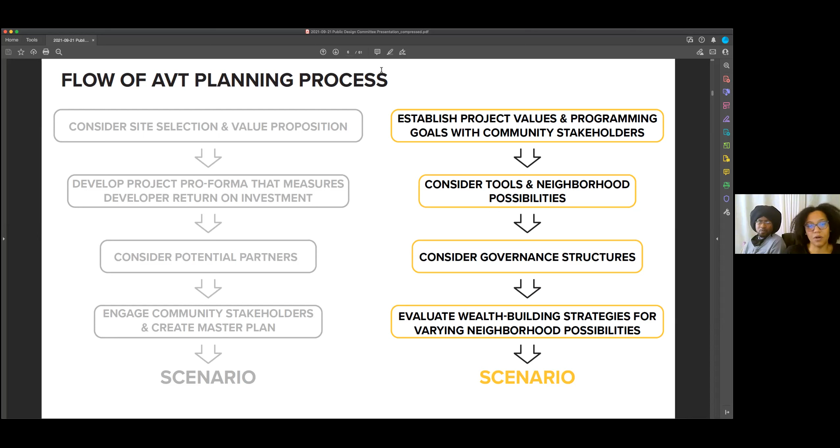What we've been doing is establishing project values and programming goals with community stakeholders first. From there, we move into considering tools and neighborhood possibilities, then governance structures, and evaluating wealth building strategies for varying neighborhood possibilities. All of this was developed out of very important conversations with our community stakeholders.

This is an overview of the roadmap we've been working through this last 18 months or so. We have a series of joy initiatives, which were moments where we were able to really celebrate with the community the history, the heritage, and possibilities for the future.

Those were also connected to community dialogues, which were a mixture of surveys and general conversations, being out in the actual community as much as you can on Zoom, having conversations sometimes one-on-one, sometimes even in other event spaces that lent themselves to those conversations.

And in the orange, you see our workshops, which we split into 3 different sessions, 6 workshops, 3 sessions each. You'll see details in a moment on what we covered in each one of those workshops.

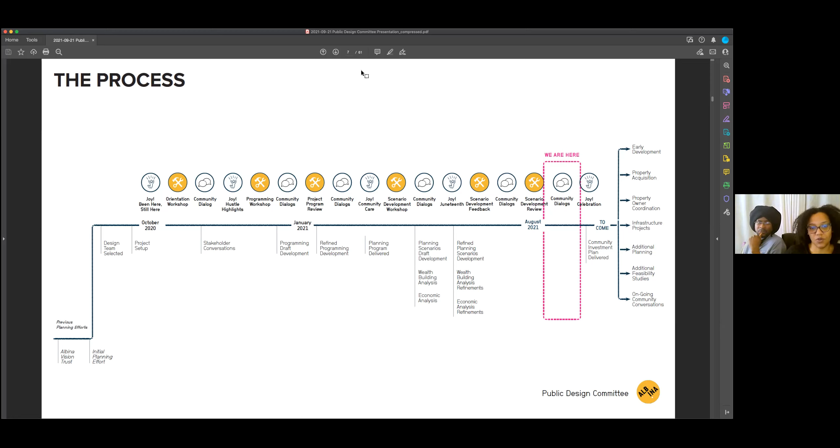Community connections: the Joy initiatives, we've had 4 so far. The first was essentially a virtual concert and interview where we talked with some longtime members of the Albina community and some newer members, getting to know their history within Albina and their vision for the future.

Hustle Highlights was a series of posts followed by a networking event with Black micro business owners. It was a really good conversation for people to make the connections they needed right before things like Black Friday and Cyber Monday, so it was highly beneficial.

Our third joy initiative was community care. We partnered with the Equitable Giving Circle by donating journals featuring artwork from our workshops that went into their fundraising boxes alongside other Black-owned businesses, helping them fundraise to feed the 500 plus families they work with on a regular basis.

Our fourth joy initiative was this summer, a Juneteenth film fest, which was again highly celebrated and very well attended.

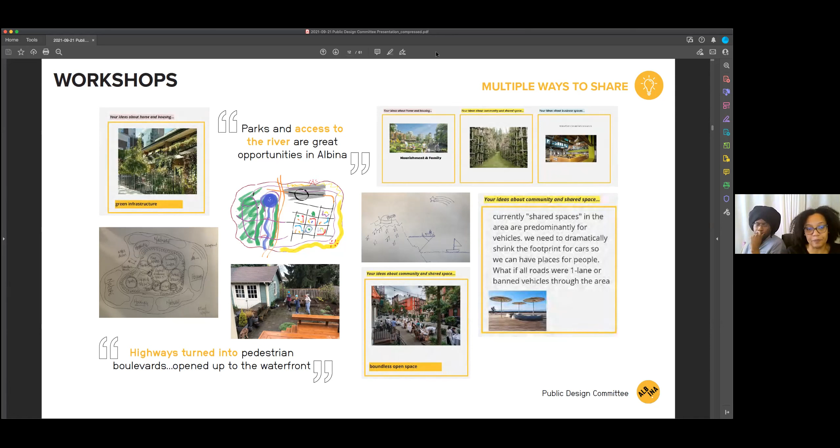So 18 community workshop sessions over the course of 45 hours, 563 attendees, 349 of those were unique individuals, and over 283 Black participants, which is something that we are very excited to see. So often Black participants and Black community members are excluded from being able to attend workshops like these in the planning of their own communities. 163 pieces of visual input from community and 20,000 plus words of design notes and community feedback, which you'll see reflected in the next few slides.

And this is where I will turn it over for the wealth building. Thank you.

This looked very different than a regular process. And we did that deliberately to think about not just affordable housing and who gets it, but how people actually have a say, how people generate wealth, how really income can be generated, passive, active, meaningful employment.

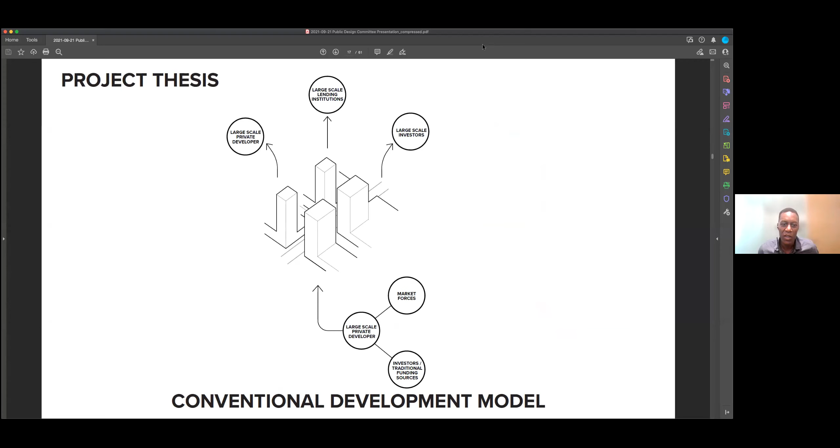This is a large, high-profile site, and so it could just be large-scale developers doing large-scale projects with a percentage of affordable. We're looking at it very differently. So the next slide shows that this process is really overlaying Black wealth, Black entrepreneurship, and Black contractors and developers. So looking at what those supply chains look like when they're integrated into a development and design for a process.

So that was done before pen was put to paper, as Kayin said, before massing was done. We thought about what wealth building looks like and what the tools are. So if we go to the next slide, we have 7 categories.

Of course, there are many more, but if we distill them down to how one gets agency, builds wealth, and generates income over time for their family, and also creates intergenerational wealth, which was something that this neighborhood lost with the destruction of so many structures, we have these 7 principles of wealth building that overlaid how the design was formulated.

So they include home ownership, which is the American way of building wealth, the pathway to wealth, but not always open to everybody. So overlaid with that is employment. It's existing business development, it's entrepreneurship, it's spurring new businesses, but it's also ownership interest.

So how can somebody have a piece of a project? And that not only generates wealth, as Warren Buffett would say, while they sleep, not just when they work, but it also gives them a say in what's being built. It gives them an ownership stake as well as the potential for building wealth and income.

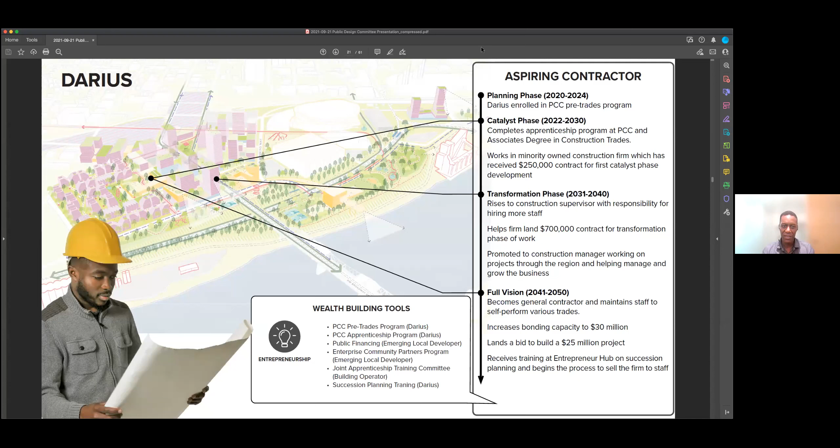So Darius was the notion of what if somebody wanted to be involved in the construction of this development. The next slide shows another scenario with Mr. Williams, an older gentleman, and how he might benefit. Can I jump in there real quick?

So generally speaking, what we were looking at doing here is taking real life scenarios and situations from the community. When we compiled that information about the needs, the wants, the goals, and the community's future vision, we began to put these narratives together. Those narratives helped us look at everything we covered previously, from economics to governance, and what it would take to get there.

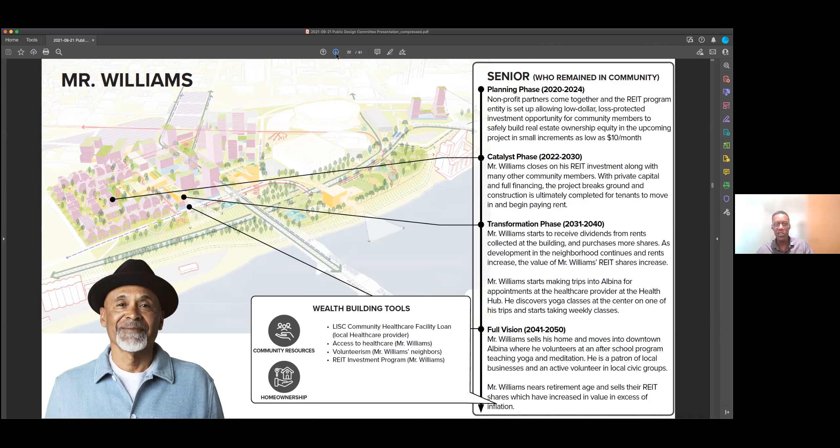So these are the actual scenarios we're looking at now for that process of moving forward and developing this piece of land. I don't know that we have to go through every single one since we don't have a lot of time, but if we click through, you can see the difference when you're looking at somebody in a 15-story tower versus a townhouse.

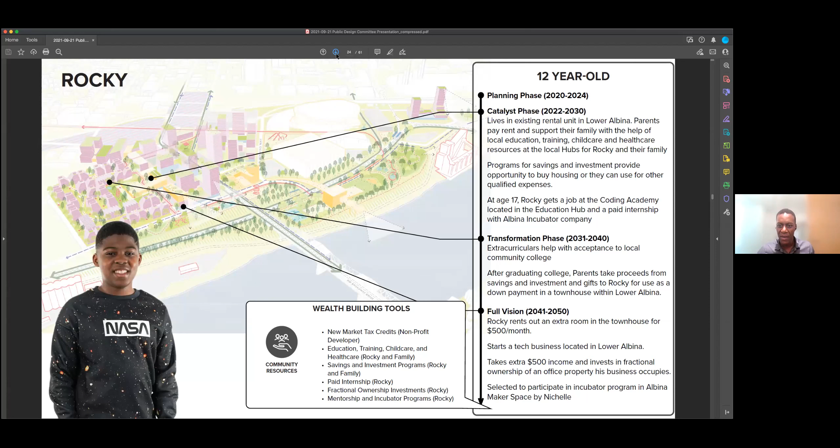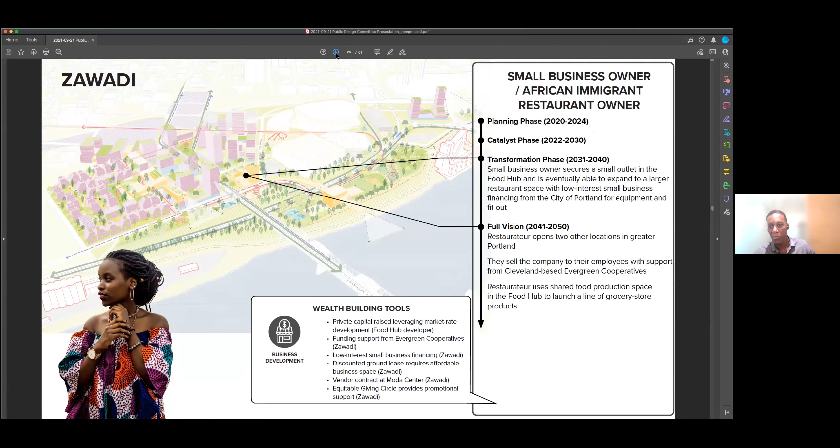What it might look like if somebody's starting a business or moving a business to the neighborhood. What it might look like for a preteen growing up during this in the early phases of development, and what it looks like at build out, and where that person is along that trajectory. These stories show a breadth of scenarios, and they came out of the workshops. They came from real people talking to us about real aspirations for their lives, and you'll see that reflected in the way the plan laid out as we started the design process.

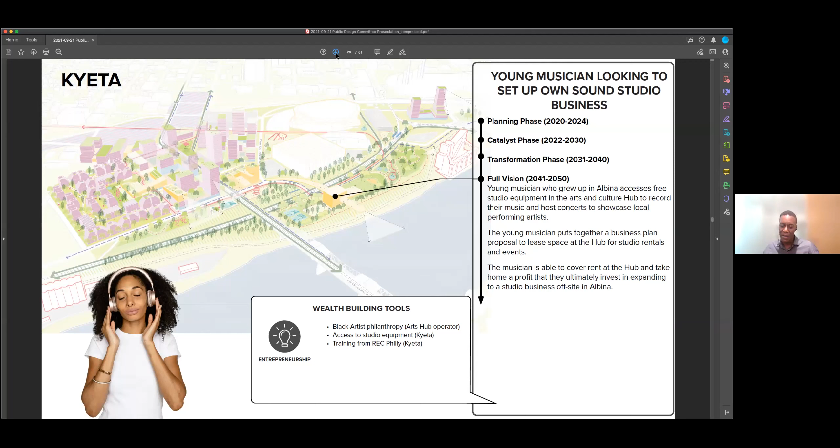I think we probably have links to these so that you could see them at your leisure. But we really wanted to get a breadth of people and how they might benefit.

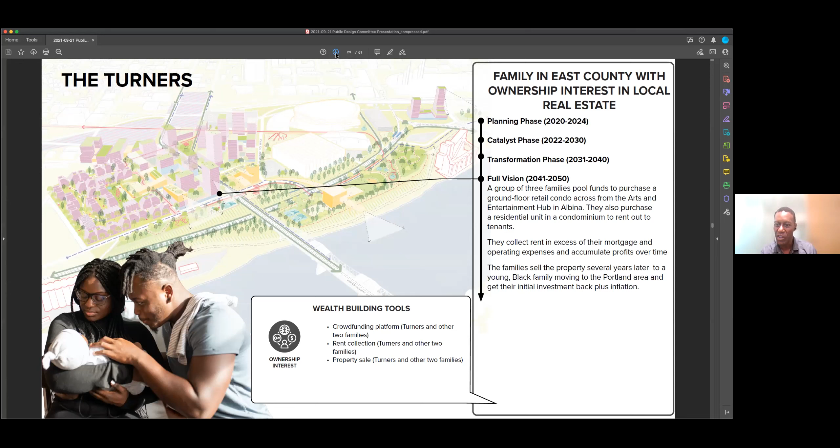So just one last thing, for example, ownership interest. What if somebody has a tie to this neighborhood but doesn't want to live there? They have a house, they have a way of being in the world, but they could still benefit from the development. They can still invest in this development. They can still grow with this development. So these different narratives really talk about people, not just in the neighborhood, but how the Black community generally could benefit from the ways in which a plan is formulated.

And then we made sure that along the way, the various experiences shared with us, the qualitative aspects of what the community asked for, remained in the forefront as well, so that we didn't lose those qualitative experiences when we started implying architecture and open space. It's these qualitative experiences that really will give Lower Albina that sense of place and sense of pride for the community.

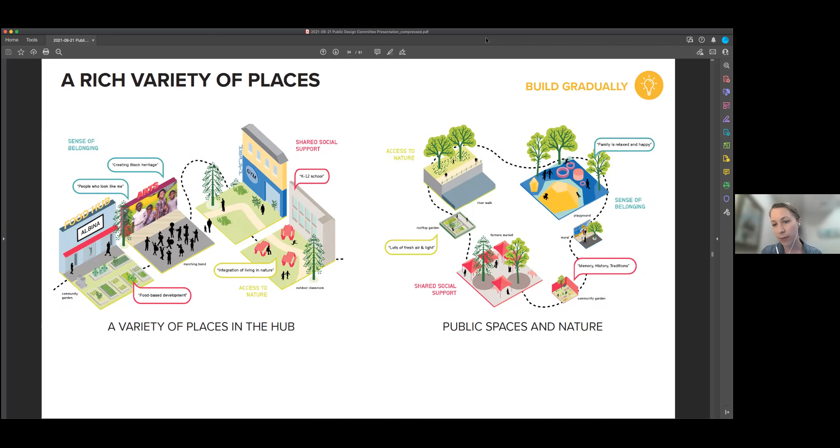Another building block is this idea of a whole range of different types of public spaces, making sure that people really felt like they were living in nature. And then finally, understanding that we need places for people to come back and live, thinking about the different components of what that could be: housing, which was a whole different range of types, as well as commercial spaces, places where a lot of jobs could exist and where people could start up small businesses. So we needed the whole range of those different commercial and entrepreneurial spaces as well.

Our next step was to start to evaluate different neighborhood possibilities and to weave back in the wealth building strategies along with the drawings we had started that document the experiences desired in the neighborhood. So rather than looking at densities from strictly a formal evaluation of urban design or planning, we evaluated the trade-offs in terms of wealth building.

For example, for low density, which is the American dream of home ownership, that might build wealth through a small contractor's ability to construct smaller structures. But it would allow fewer ownership opportunities and fewer in the Black community to benefit from wealth creation.

Then we started looking at medium density and high density and different models there, and evaluated through a series of metrics. The thesis of the project is wealth building. We lead with wealth creation, we lead with people's stories around that, and we continue to benchmark different possibilities and scenarios up against the kinds of wealth opportunities available.

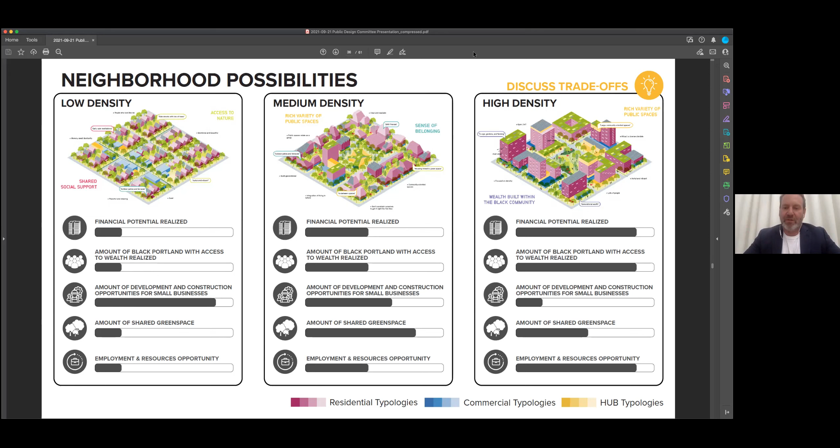One of the things we talked a lot about with this site is, as complex and challenging as it is, one of the nice things is it offers a lot of opportunity for diverse strategies. We were able to talk with the community that it wasn't an either-or choice. There were probably parts of the site appropriate for low to medium density, while other parts were appropriate for high density.

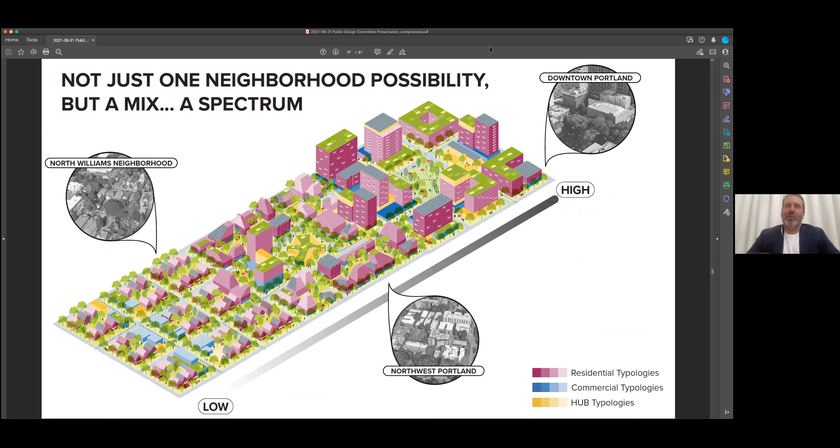This is exactly what we started to discuss, where we were actually in control together of these toggles. We talked openly about different parts of the site and where different neighborhood possibilities made the most sense, knowing that all the time we were adjusting these toggles of wealth creation potential with each choice we made. So we made these choices together.

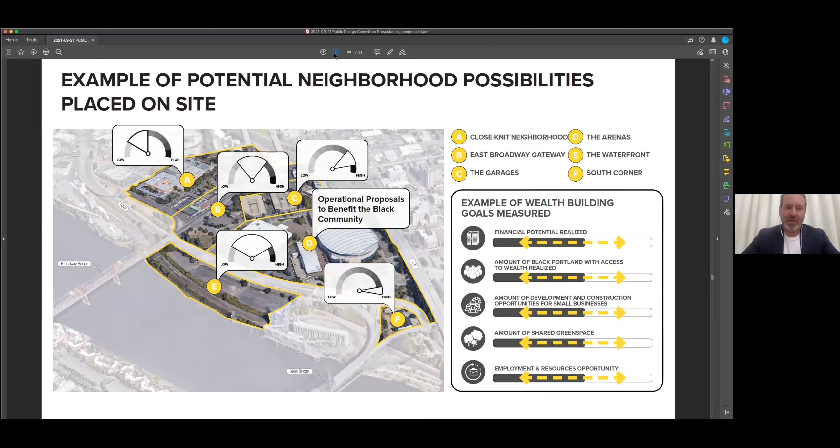This led to the beginning of a plan that synthesized a lot of these wealth building criteria and evaluations of the potential.

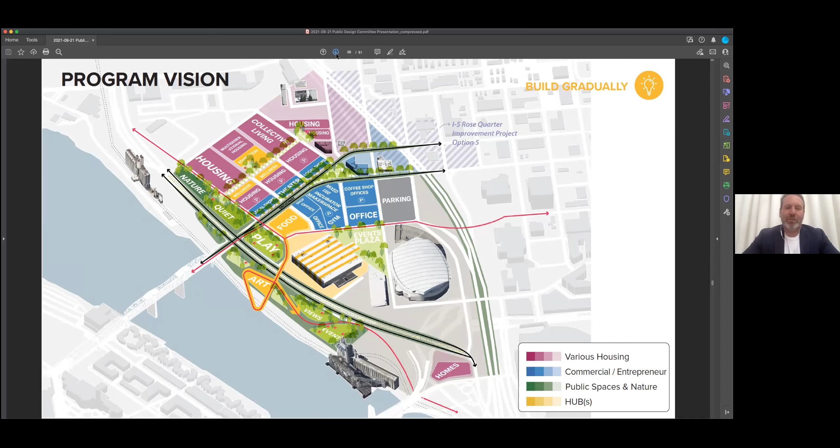I wanted to talk about how we built this site plan organization. The first thing, as Brie and Sean had mentioned, is this idea of hubs. This was benchmarked off a project from fellow Meadows, who was on the team, who had developed a hub like this in North Omaha. It was a mashup of incredible community services, entrepreneurship, adult education, and child education.

There were academic partnerships with local universities and colleges. There was urban aquaponics, urban agriculture. There was a soul food restaurant and an event space. This hub served as an inspiration for us to think about a network of hubs focused on education, entrepreneurship, food, health and wellness, and art. This network created a soulful spine that connected neighborhood identity, and in each case was deeply rooted in the needs and expression of Lower Albina.

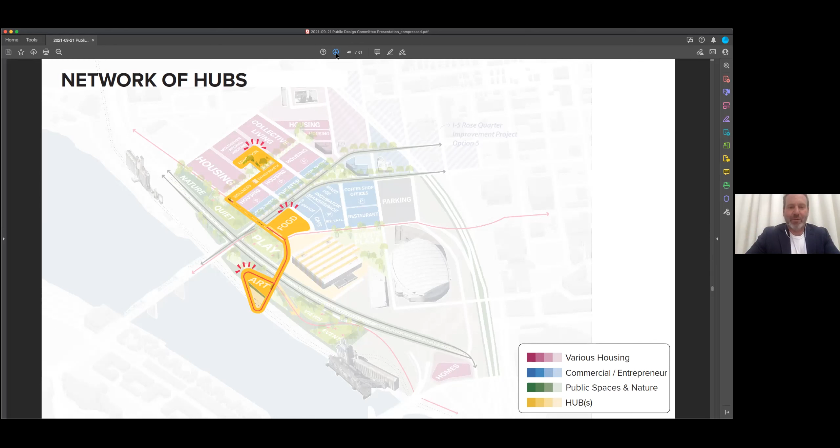The other piece that's part of the framework of the overall neighborhood is the public realm, the open space. You can see clearly the idea of reclaiming the waterfront. We heard over and over that people were interested in views, in being within nature, but also places that were vibrant and collective.

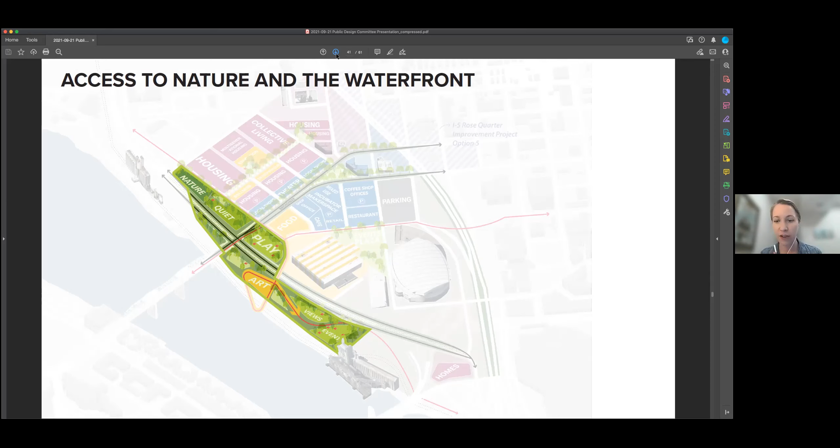We tried to think about this band of open space along the waterfront that could transition from more natural, more quiet, more related to a neighborhood to the north, down to something more communal, a place of celebration, tied into the hubs, the food hub and the art hub south of Broadway, taking advantage of great views to downtown and the bridges, with events and gathering places.

And then to the north, the first neighborhood that would develop is an area centered on that education hub, emphasizing the idea of living close to and connected to schools and learning. It could have a whole range of different housing types connected to wealth generation strategies, enabling families of all ages to live together—multi-generational housing and all sorts of different access points.

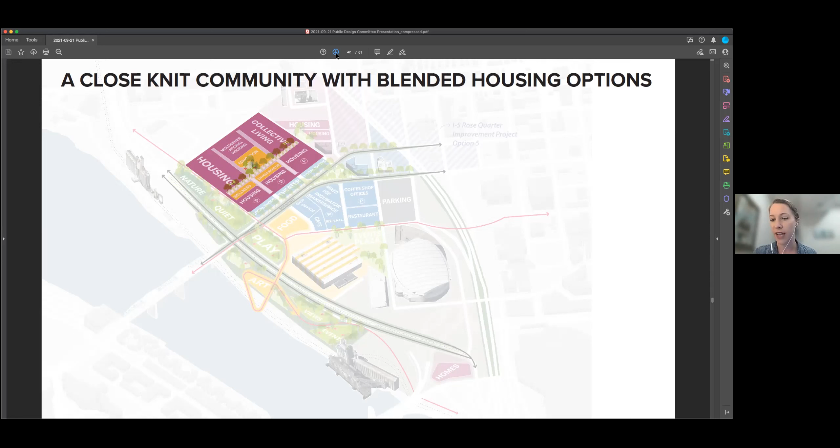We recognize that along what we've been calling the Broadway Gateway, as you land from the Broadway Bridge into Lower Albina, we used higher density models to create a sense of framing arrival and a gateway into the community, both from the neighborhoods to the east and from the bridge itself.

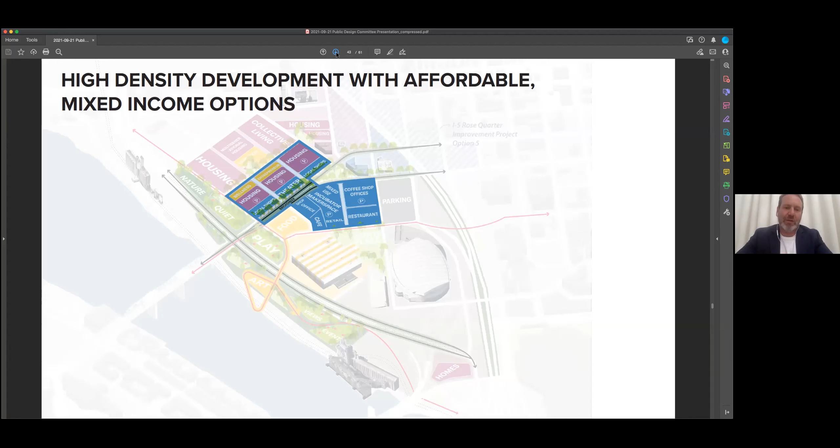These typologies are more dense residential over commercial uses, but along the Broadway Gateway itself there's a really strong emphasis on local businesses. We heard a lot in the workshops about the need to reestablish small local Black entrepreneurship in a centralized place, creating that feeling of extended family and a network of entrepreneurs helping one another.

We also realized that because of the complexity of the site, and because of what we've been calling the arenas to the south, there were different kinds of opportunities and urban edges—edges that focus on local retail towards Broadway, and other retail and commercial wealth creation opportunities facing south that leverage a higher volume of people coming and going for events.

There's also the Albina Gateway that faces out to the riverfront, which we saw as an opportunity for the neighborhood to express itself at a city scale. And then there are the neighborhood edges and sensitive, fine-grain urban fabric that define great city neighborhoods, focusing a lot on the sense of porches and shared green space within these communities.

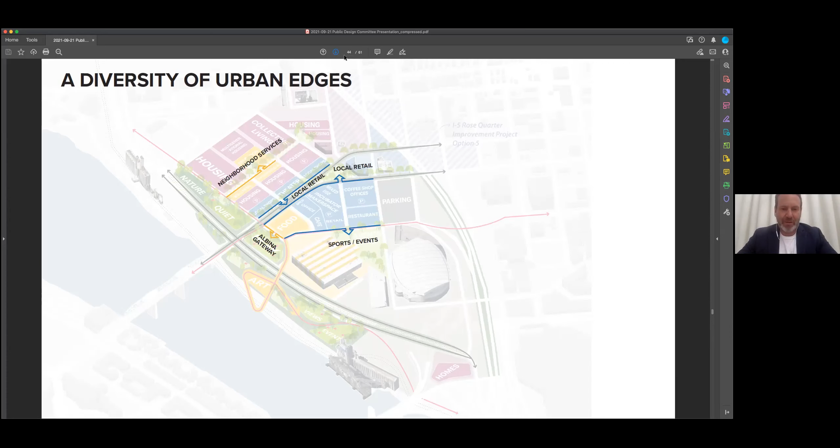As this unfolded into three dimensions, we started thinking about a time-based scenario sleeved into the wealth creation scenario. If you go back to some of those personal stories we shared earlier, those stories happen over time, and a development like this happens over time too. We're in the process of the planning phase right now.

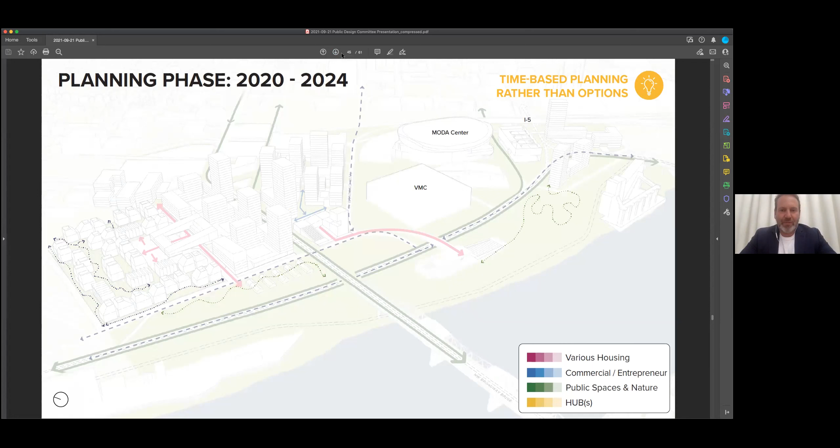We're calling the first phase the catalyst phase, which focuses in and around where the Portland Public School building is today. We've imagined this as almost an eco-focused community with shared gardens and green space, medium density housing that's family centric, and as Brie mentioned, a very wide variety of housing opportunities. You can see the education entrepreneur hub formally starting to step up in scale, leading into greater density along Broadway.

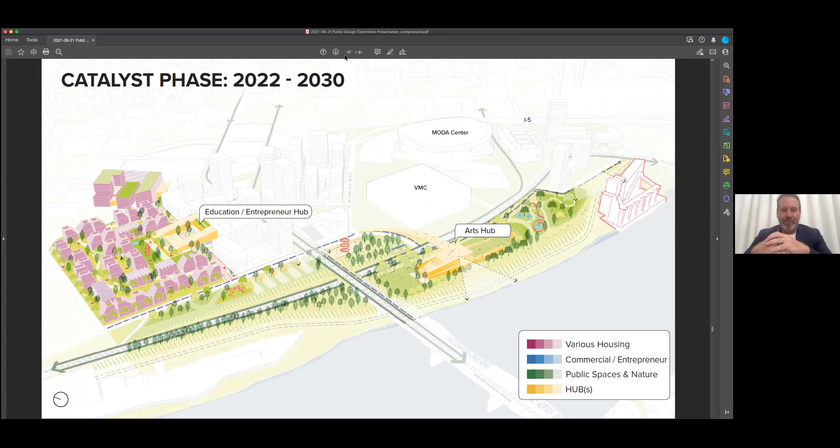Here we see the waterfront take shape, building around the neighborhood. You can see how the event space south of the Arts Hub would engage the architecture of that building while also taking advantage of the river, and how some of those other spaces can offer a gradient and a real range of different uses.

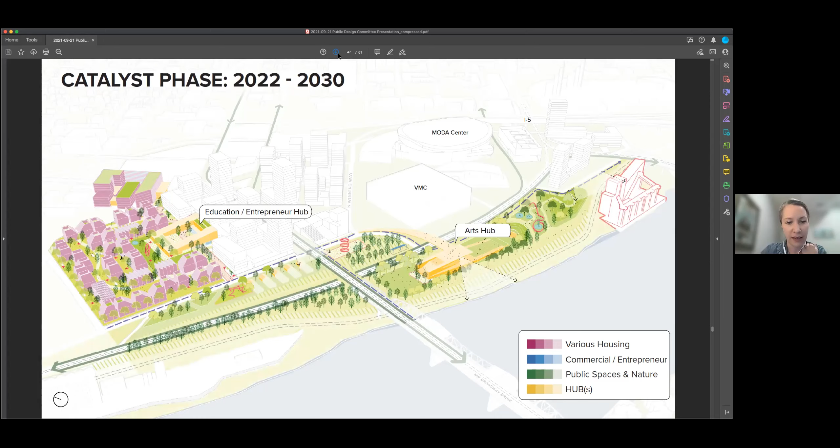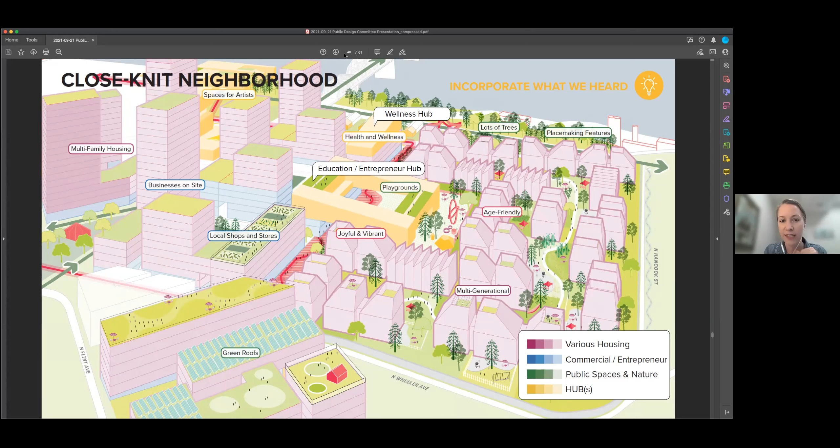I love this view too, looking over the close-knit neighborhood, because you can see how you create these little different sub-neighborhoods within it. We've imagined that some of those backyards could be private, but they could also be small group areas—a couple of shared areas grouped together offering different types of semi-private shared spaces.

We talked about the density along the Broadway Gateway, and here we also get the opportunity to introduce two more hubs: the Wellness Hub and the Food Hub. The Wellness Hub has a special relationship with the green space across the street, which we're thinking could support neighborhood-centric, quieter uses like urban agriculture, greenhouses, and urban gardens. The Food Hub is a celebration of Black cuisine—we imagine it as an incubator for Black food and beverage businesses, as well as a great citywide destination for everyone to come see who the hot new emerging chef might be.

And you kind of see the network of hubs really taking shape in this phase. I'll also point to the I-5 cap, where we know there's aspiration to cap I-5 to create greater connection to the east and north, and continuity of connectivity of these neighborhoods to Lower Albina. Right now we're leaving that open. We know the design and engineering is still underway, but we imagine it also being a mix potentially of commercial, residential. Next slide.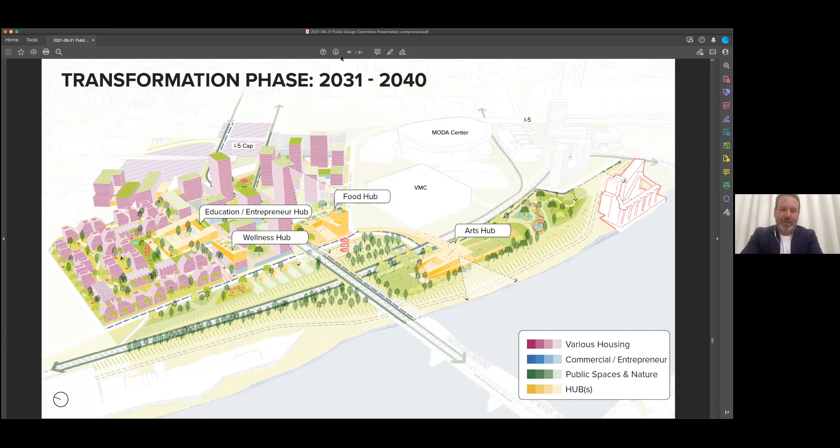And you can kind of see how we're using density in this case to step up towards really framing a beautiful new streetscape. We've talked about narrowing the street, giving more room to sidewalks along Broadway and cafes, and celebrating the food hub as a primary point of arrival.

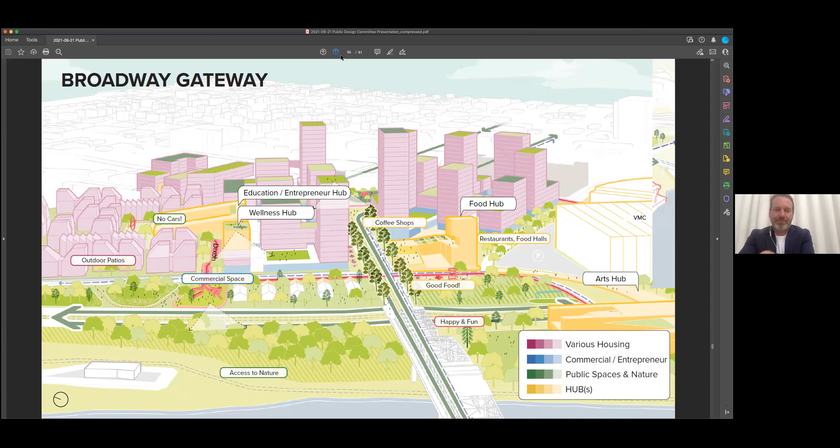Next slide. The final full vision reimagines some of the parcels to the south, perhaps another sports-based hub that's also a hybrid parking garage to the Moda Center, complementing a new parking garage we proposed to the north that replaces current parking, not highest and best use facing Broadway. So again, the full vision imagines appropriate adjacencies with densities in the right places and a blend of wealth creation opportunities. Next slide.

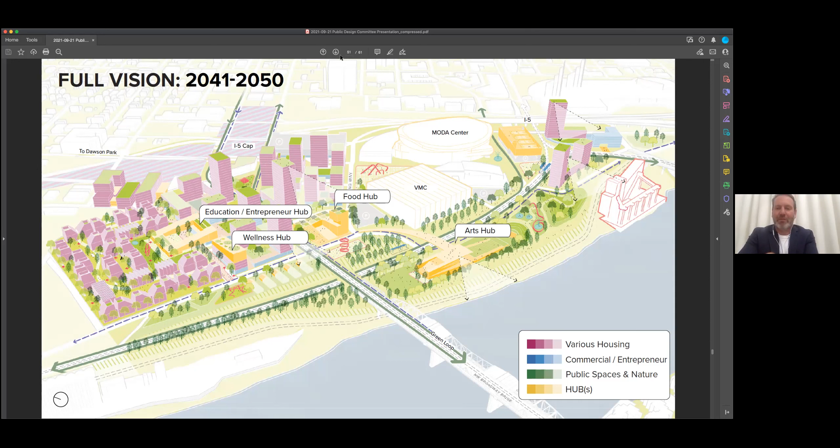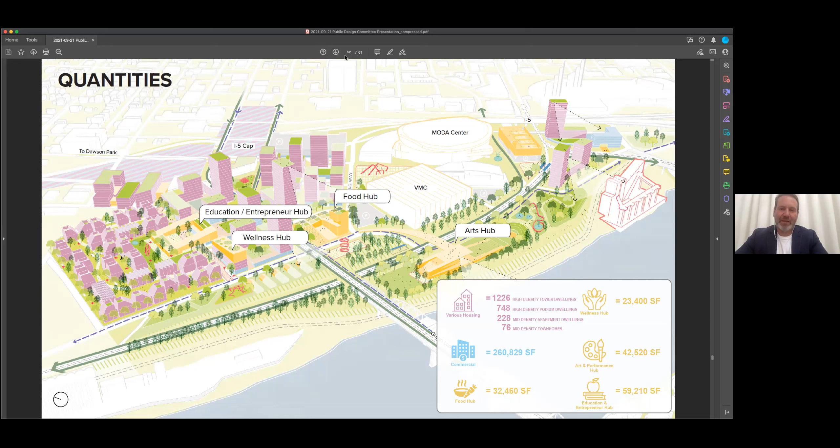We need to update these numbers - I think they're even higher for the residential, but at one point we were approaching about 2,500 new residential dwellings, a mix between higher density apartment units to mid-density apartments and potential ownership condos and townhomes. 260,000 square feet of commercial, and then various sizes of the hubs that serve to culturally activate the neighborhood. Next slide.

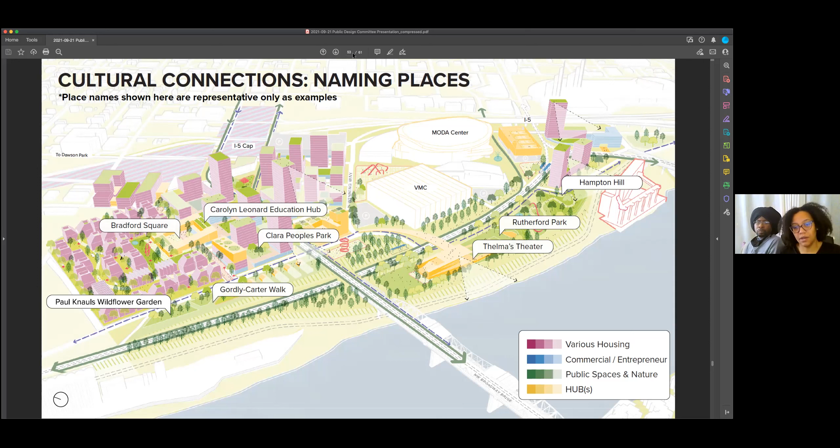Kayin, maybe you want to jump in. Yeah, so circling back to the community connections and cultural connections, this is an example of some possible naming conventions. These are definitely just placeholder names, but it really pulled the community back into looking at who heroes are, who people of importance within the community are that need to be highlighted or people would want to have highlighted, throughout this newer development. Next slide.

And then finally, we're looking at the monuments, a series of 6 monuments throughout the area. You have one highlighting the rivers, one highlighting knowledge within the community, a Broadway gateway entrance on either side of Broadway to the area, a cap monument dedicated more to the history and how the community has survived and thrived throughout all the destruction and divestment. A Central Plaza Monument, geared towards the residential area and people being able to really sit and relax and enjoy. And then finally, a skyline monument.

One of the things we heard throughout the workshops, a very poignant question, was: where is my million dollar view? We wanted to make sure this was accessible to all of the community, and that as we get into the high rises, it's not about somebody's personal economics, but really more of an egalitarian system. In addition, the monuments are not only there to share and for folks to enjoy the rich history, but also to connect with economic development, with cultural tourism, and be a hub unto itself when it comes to development, growth, and economics.

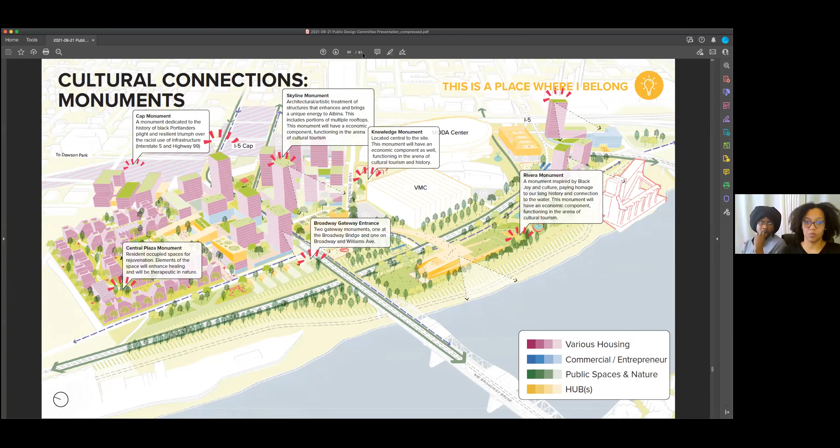So I think this is a good place to stop. We'd love to have a follow-up conversation with everyone now, but it's certainly been an incredible process, and as much as we've functioned well together as a team, we feel the stakeholders and participants from the neighborhood have been the most important team member along the way. So maybe we can open it up for conversation.

Sure, thank you Josh, it's David again. Fantastic presentation - like Bob said in the chat, the diagramming and the visuals are very easy to follow and very exciting to pick up on. Not the least of which is the opportunity for a gateway there at Broadway. I see that so clearly.

We usually pick up questions from the chat box. I know I threw something in there. And Brian, I don't know if you've been looking down through them. No, David, your question is the only official question that I've got copied over.

Okay, well I can just go ahead and tell you what I was thinking there. I actually received a physical flyer about what was called Hybrid Solution 3 for lids on I-5, and I thought it was really timely because I knew we were going to see you all today. So I was asking, is this something that's officially endorsed? I see it's obviously tremendously impactful to what you're doing. But Zari or whomever, Winta, can someone give us a sense of the difference between the two, endorsements or not?